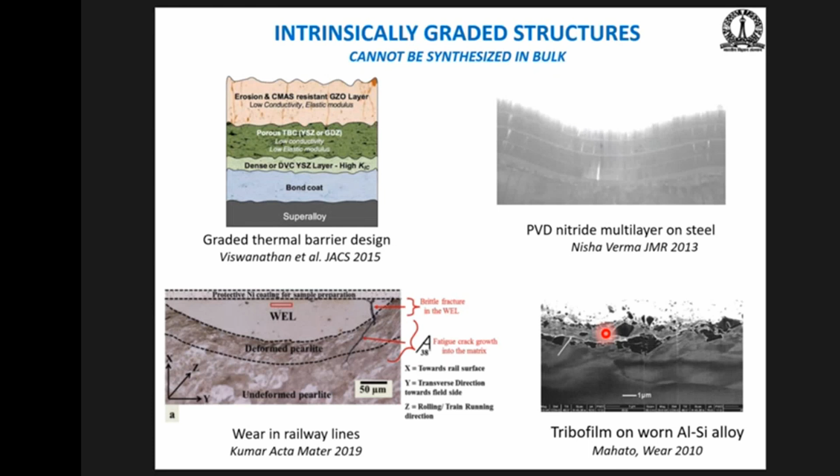So that's one class of systems where you need to find ways of testing small samples. Then there's a whole domain of life extension and repair. So this is a steam turbine blade. And on the right, you have some gas turbine components, which you'll see the damaged one here and how it is rebuilt with additive manufacturing.

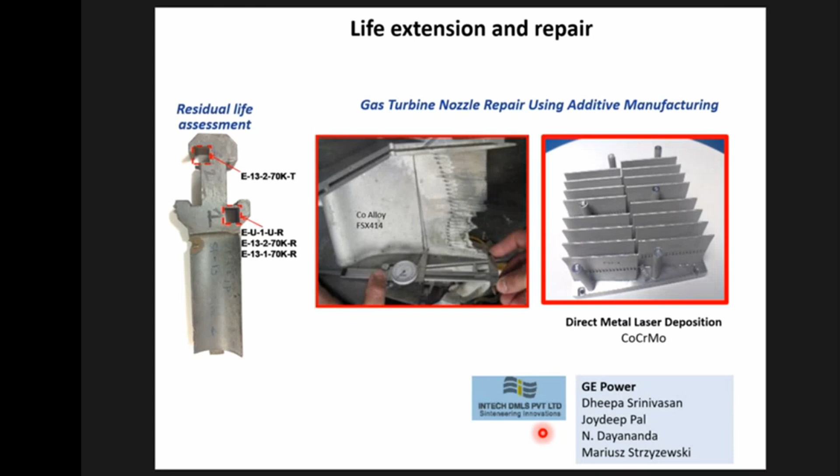This is again from the work of people in GE Power and Intech. So you need to be able to evaluate what it is that you've added on, whether its properties are satisfactory and whether they are integrated to the bulk and the interface is all right.

In case we think this is all very new, the testing of small systems goes back a long way. And I was preparing an article, and I'd always thought Griffith was the first person to look into this whole business of strength and glass fibers and so on. But about 20 to 30 years before, there's this gentleman called C.V. Boys, C. Vernon Boys, I don't know what the C is for, who was testing quartz fibers made by taking

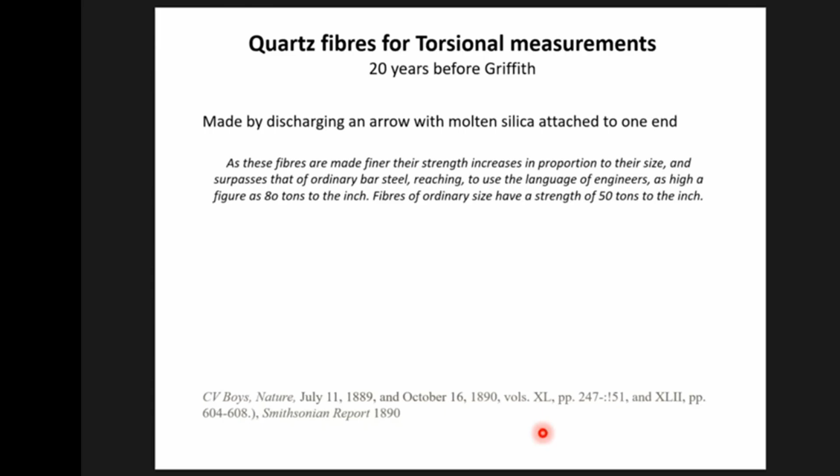a bit of molten silica and firing it out from the tip of an arrow. And so as it flew out, it solidified very rapidly and made very small fibers. And he was able to do things which are quite astonishing for that period in time. He was able to measure the gravitational constant using much smaller objects than Cavendish did in those famous experiments. And if you work out the numbers, in terms of force that he was able to measure, he was measuring forces as small as femtonewtons, being able to detect the radiation from the moon, from a candle, and so on.

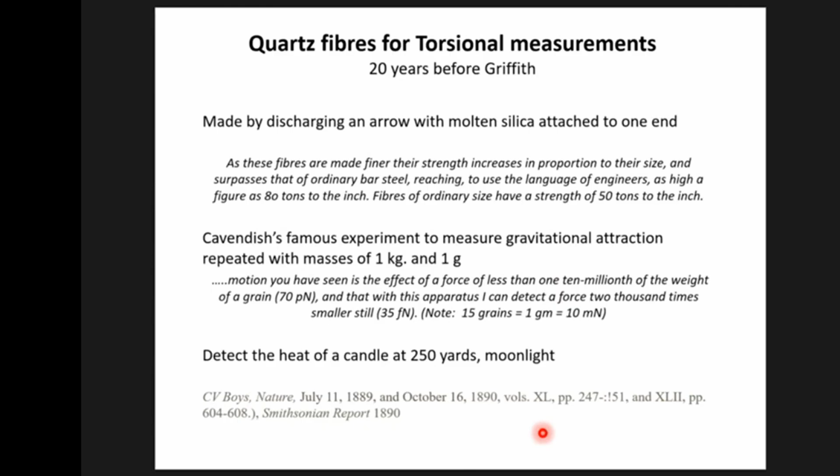About contemporary with Griffith was also this paper from the Bureau of Plant Industry, some very obscure institutions that did such work, where people were interested in thermoelectric wires, and these were for temperature measurements. And so these were experiments where very fine fibers of bismuth and antimony were drawn. And some of the things we now know very well were understood even then, namely that the strength increased and that the materials exhibited a fatigue limit. That is, below a certain stress, they would not fail at all, stand indefinite bending.

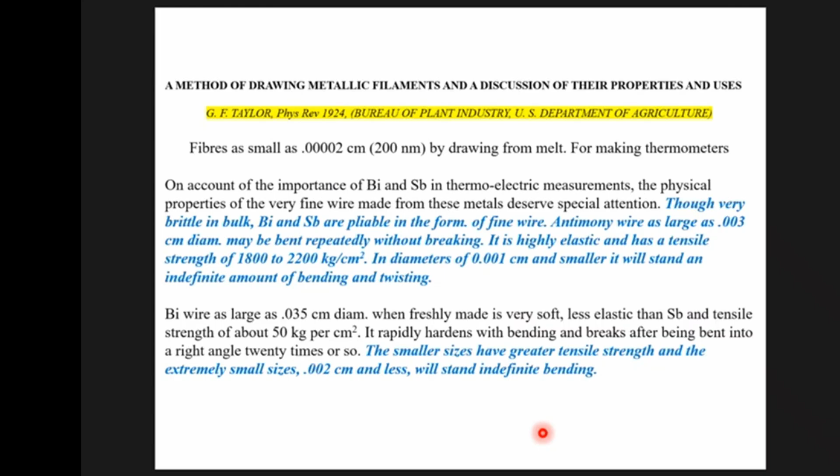The other part of this business is bending and the convenience of bending. I think it's arguable that mechanical testing began with bending earlier than people did uniaxial tension. And this applied to elasticity, plasticity, and of course, creep.

And these are two papers from the early 1930s, where they took some enormous lead beams and put strain gauges on them and established certain things. First of all, they established that the strain was linear across the cross-section, even though the stress and strain are no longer linearly related. This is power law creep. They established that after a primary stage, if you look at the strain, it reached a steady state. That is, the strain increased linearly with time.

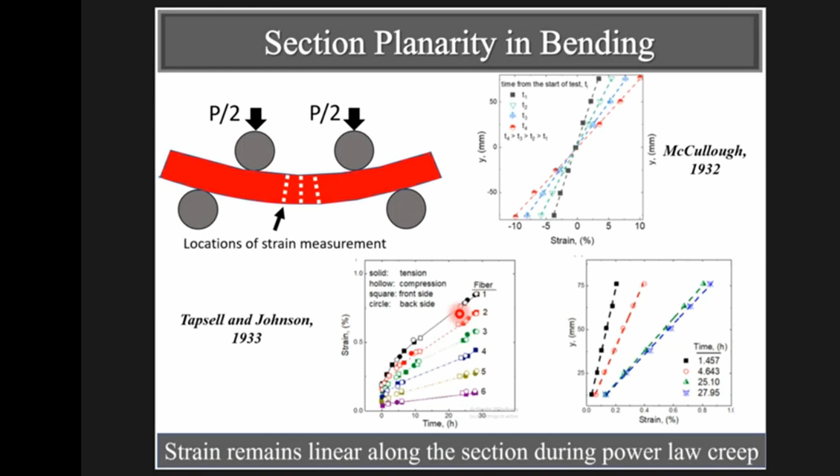So they were able to recapture many of the attributes of uniaxial creep in a bending experiment. But the catch was that since stress and strain rate are not linearly related, you didn't know what the stress was. You could measure the strain and establish that it's linear, but you didn't know what the stress is. This is fundamental to all bending experiments involving nonlinearity. In uniaxial experiments, you take the load and divide it by the area to get your stress. You can't do that here.

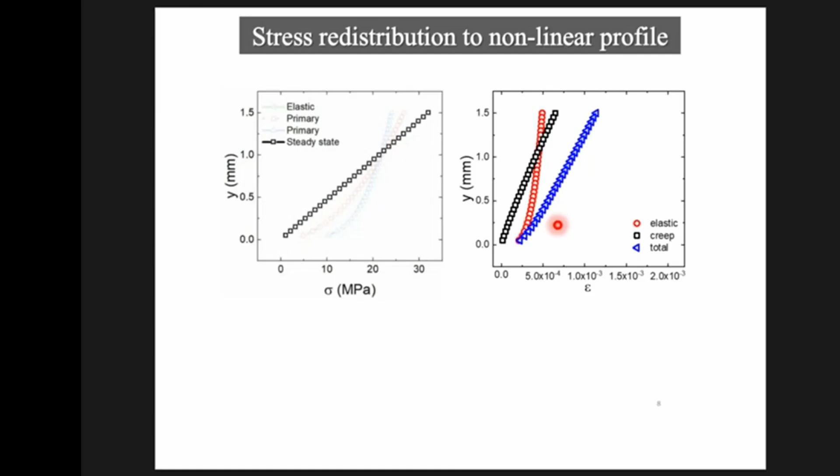Here's what's happening. Point 0 is the neutral axis, the midpoint of the beam, so we're showing one half of it, and the x-axis is the strain. When you start, you're predominantly elastic, so total strain and elastic strain are more or less the same. There's very little creep. As you start creeping, the nonlinear part of the deformation becomes more important, and your stress now has to adjust itself because the strain remains linear and therefore the stress can't be linear. So you have this phenomenon of load shedding: instead of the stress being here as in elasticity, it drops, and near the neutral axis it actually increases.

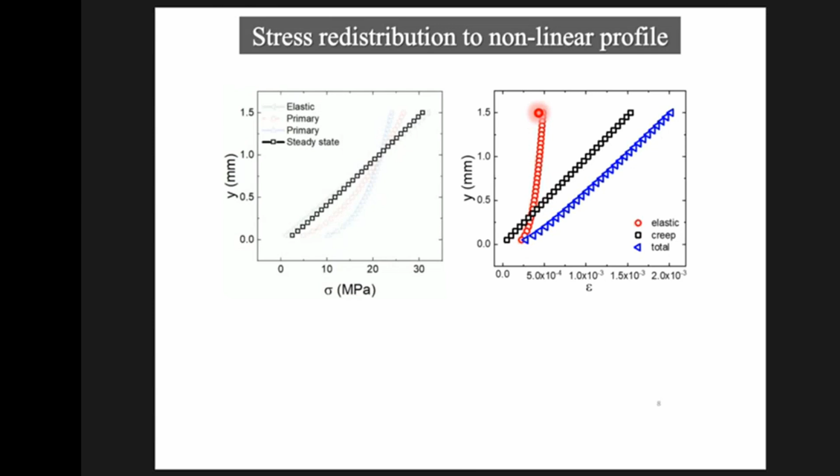So if you think about it, this is the same phenomenon. By the time you've reached a large creep strain, where you can neglect the elastic part, your total strain is more or less your creep strain. But the distribution of elastic strain actually tells you the stress, so the stress distribution is proportional to the elastic strain.

This is a very familiar phenomenon, nothing very mysterious. We see this in a fiber reinforced composite: the load is shed by the softer material to the harder material. In a dual phase ferritic-martensitic steel, the stress shifts to the martensite, and so on. This is a case where you have load shedding from a purely geometric effect. We know this in bimaterial beams: if one half is stiffer than the other, it'll take more of the load, and the neutral axis will shift to the harder side.

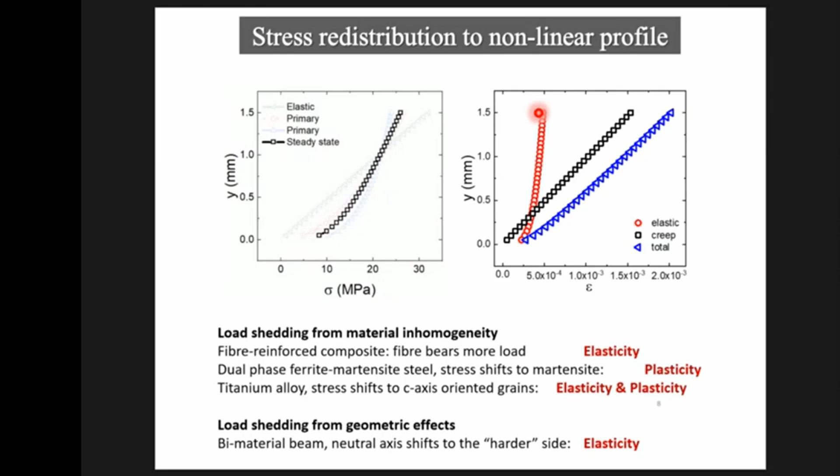So this is a brief historical survey of the people working in bending, starting with elasticity and creep. After these early experiments, around the 1930s up to the 50s, bending sort of fell out of favor because of this nuisance, that you didn't know what the stress was.

People were perfectly happy to do uniaxial experiments, with one exception: ceramics, because it's difficult to do uniaxial experiments, especially in tension. So people continued to do bending in ceramics and look at many aspects of deformation, particularly creep, because there's not much plasticity otherwise. If you're interested, there's a review in the Journal of Metals from about 6 years ago, written by a former student of mine now at Johns Hopkins, which surveys this part of the history.

So this is an outline of what I'll present: the idea of getting multiple stress-strain rate pairs from a single test, so you replace half a dozen creep tests with one test; sample thickness effects; and the situation where you don't have steady state creep. Namely, there are some systems where you either go into tertiary very quickly, or you have a non-steady state decaying creep, sort of Andrade-type deformation.

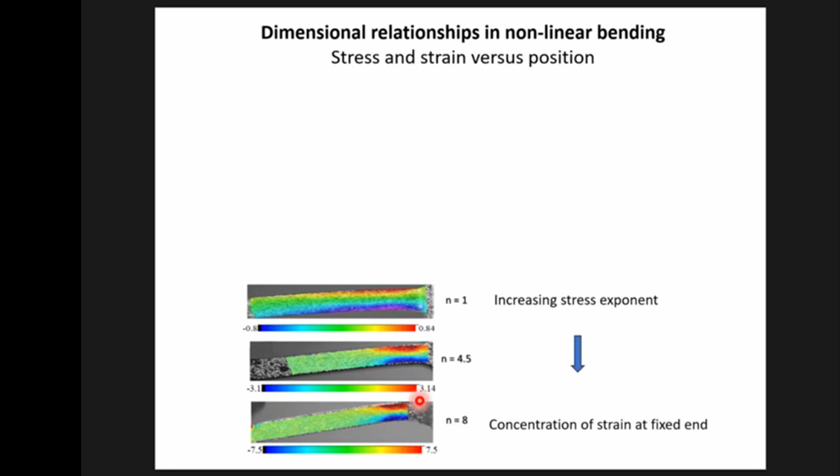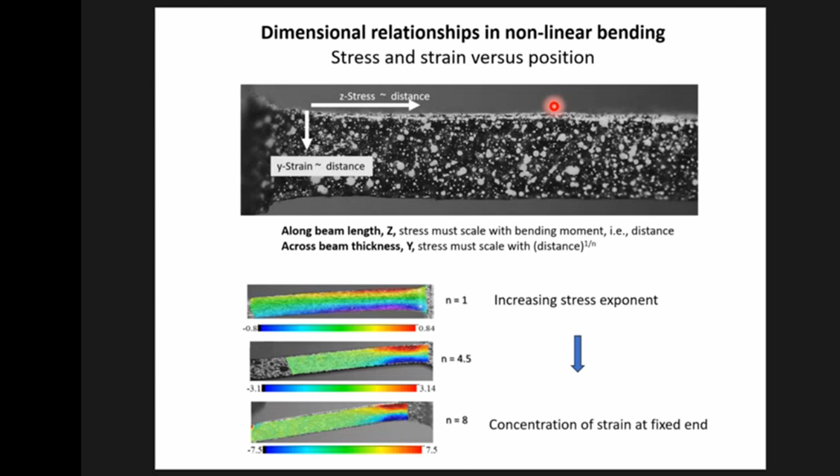Nevertheless, there are certain dimensional relationships that hold. The first is that stress must be proportional to the bending moment, and therefore it scales linearly along the length of the beam. Compatibility dictates that the strain is linear across the cross-section. So you don't know what the stress is across the cross-section, and you don't know what the strain rate is along the length, but these two must hold.

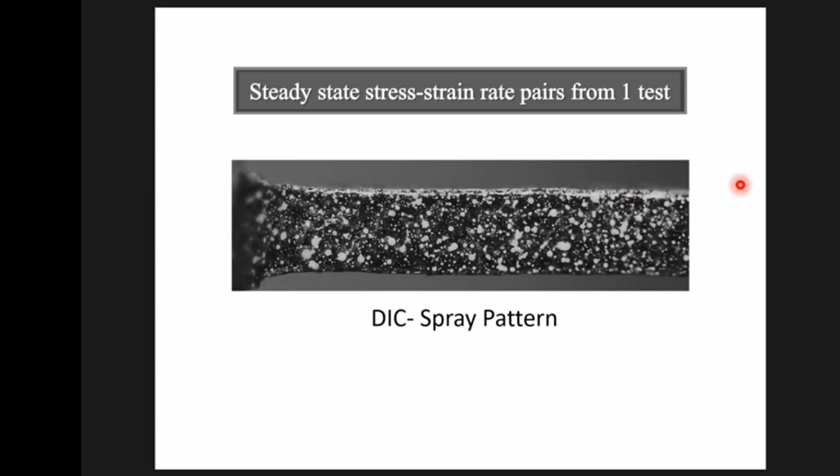So here's roughly how it works. This is the DIC spray pattern. What you see on the left is the fixed end of the cantilever, and the load would be applied somewhere on the right. And then as you monitor the strain, you'll see this beam bending.

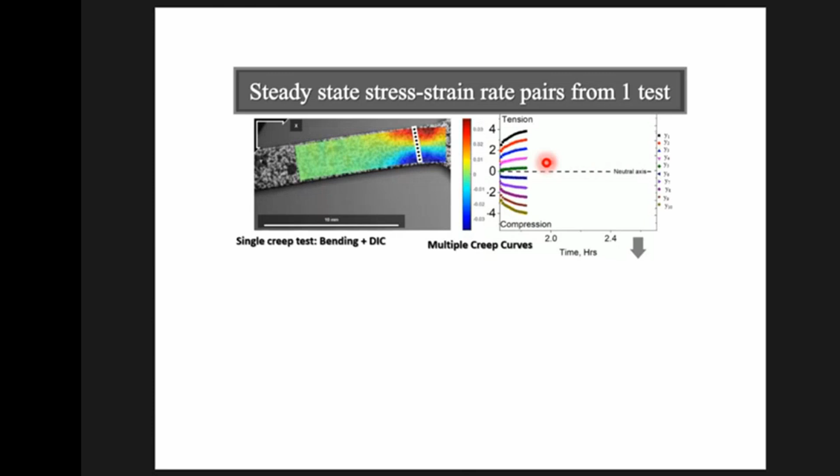Now that's as far as steady state creep goes. When you have primary creep, we know that the creep rate is changing with time. The exponent that relates stress and strain rate may not be the same as in steady state. But it turns out that when you watch the stress state change from the linear behavior to the redistributed shape, there is one point at which all these lines cross, more or less irrespective of what the stress exponent is. So the shape of the stress distribution across the beam depends on n, the stress exponent.

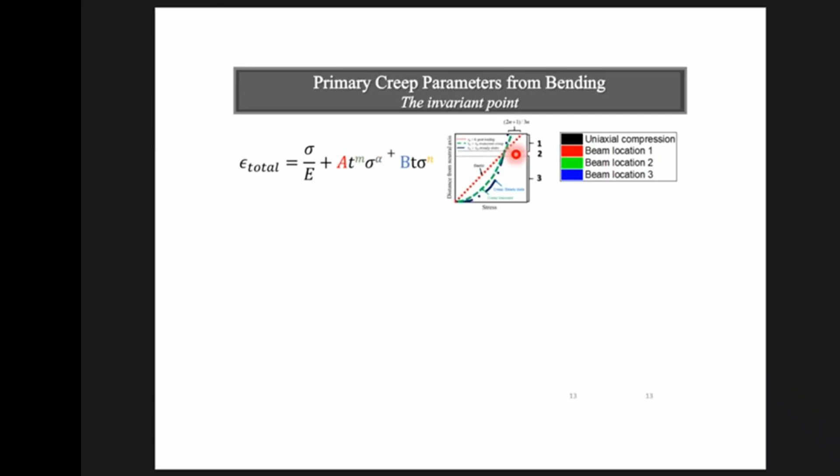If it were plasticity, it would depend on the relationship between stress and strain, which is the work hardening coefficient. So if you now monitor the stress at this point 2, which is roughly two-thirds of the distance from the neutral axis to the top surface, you will find that you can recover all these exponents. This is a representation of the total strain as elasticity plus the primary part and the steady state part. If you look at beam location 2, the green thing here, you'll find a very good correspondence with the black uniaxial data, because the stress there effectively doesn't change.

And therefore you're doing a uniaxial experiment at that point. So by moving along the length of the beam at two-thirds of the distance from the neutral axis, you are getting multiple strain rate curves for different stresses.

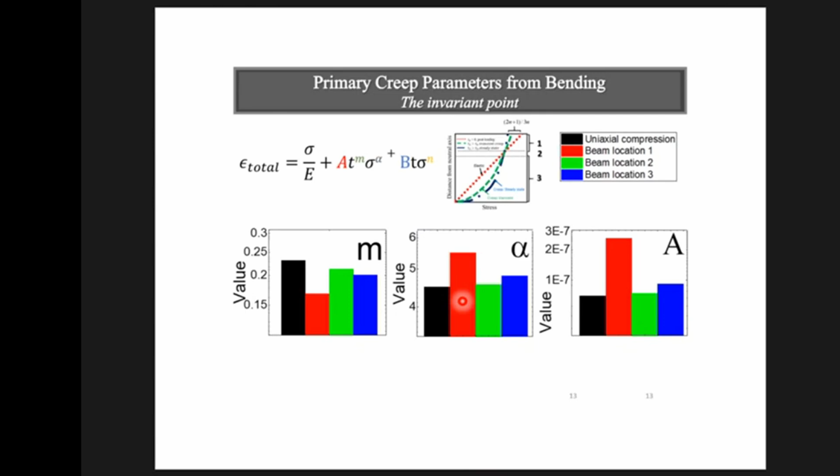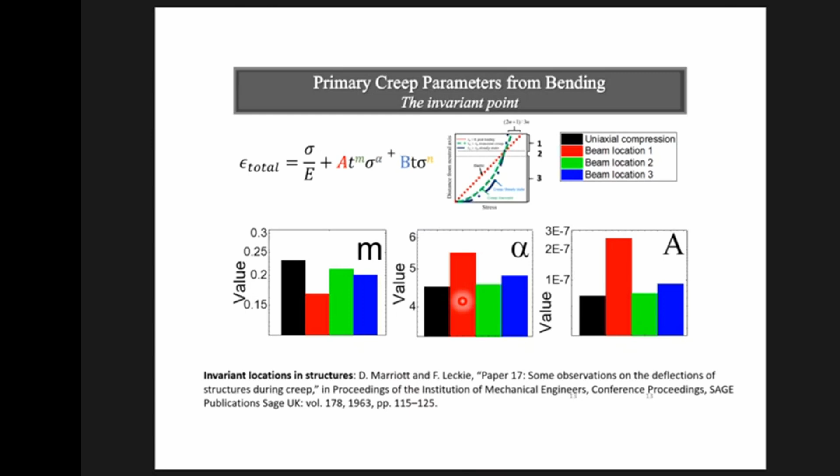Now, we thought we'd done something very clever, but then unfortunately the student read the literature more carefully and found that somebody had noted this in 1963. This is Marriott and Leckie. It's in some obscure proceedings, I don't know how she even found it. But essentially, this was a numerical calculation of beam bending which showed that there were certain points which they called skeletal points. We call them invariant locations. It's all the same thing.

Using this, one can do things like use additively made materials when materials are in short supply. I'll show you a bunch of curves like this. They basically tell you that the data you get from the literature and what you get from bending all fall on the same line. Essentially, you're getting multiple stress strain rate curves from one sample.

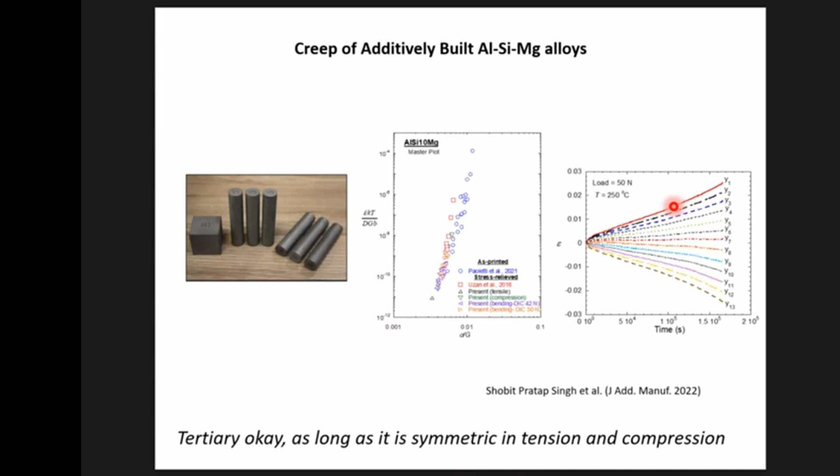Now let me address something which is a nuisance, namely sample thickness effects. If you're doing science, length scale effects are very interesting, but if you want to generate realistic data, length scale effects impose a limit on how small you can make your sample, because then you start getting information which can no longer be extrapolated to the bulk.

So here's a test. I must thank Anton Paar, who makes these micro indentation systems. At their lab, they had very small beams. This beam is about 0.5 millimeter in thickness. So we needed a facility for imaging and loading, which we availed of at their laboratory near Delhi.

So you'll see exactly the same bunch of curves, from that beam bending. There's a bunch of creep curves developing on the left. When you plot the data, bulk data, meaning anything above about 3 millimeters or larger, essentially gives you a scale independent behavior. But when you test smaller beams, you find there's a strengthening by a factor of anywhere from 10 to 100. So in bending, small beams are stronger.

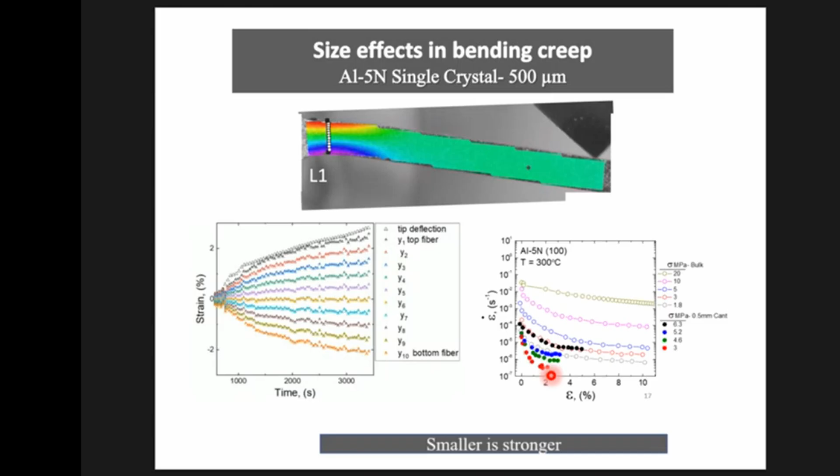Here's another example, commercial purity aluminum, 5 nines aluminum, at 250, 300 degrees. Again, this top set of data is for what's called bulk, anything which is 3 and above. Here we're progressively reducing the thickness of the beam, and you'll see very dramatic differences—in this case, probably 2 or 3 orders of magnitude strengthening that you get from small beams.

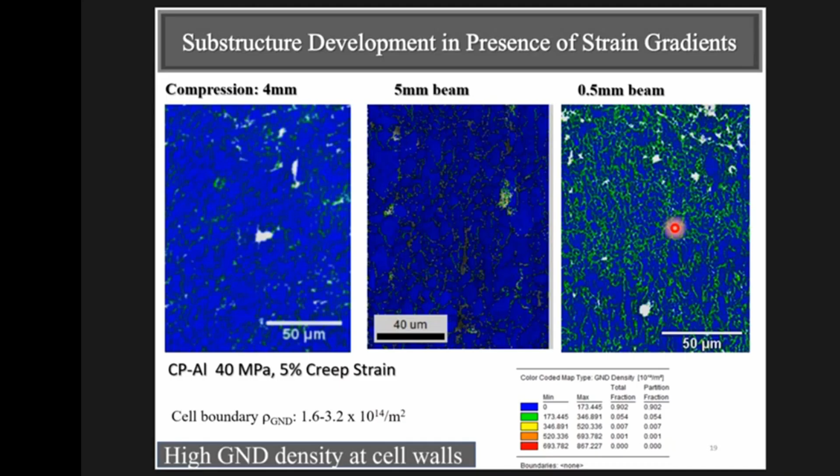Now it turns out that the substructure you develop during creep is similar to what you have under uniaxial conditions—that was established independently. But when you get to very small beams, you get a much finer substructure of dislocations. We argued this is because of geometrically necessary dislocations, since your strain gradients are extremely high. Remember, at the neutral axis the strain is zero, and you have maximum strain at the surfaces. These pump in additional dislocations, which refine your structure and thereby reduce the creep rate.

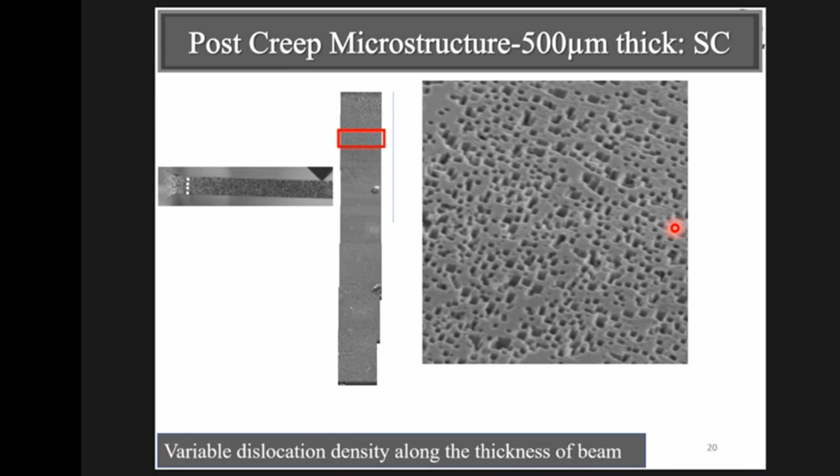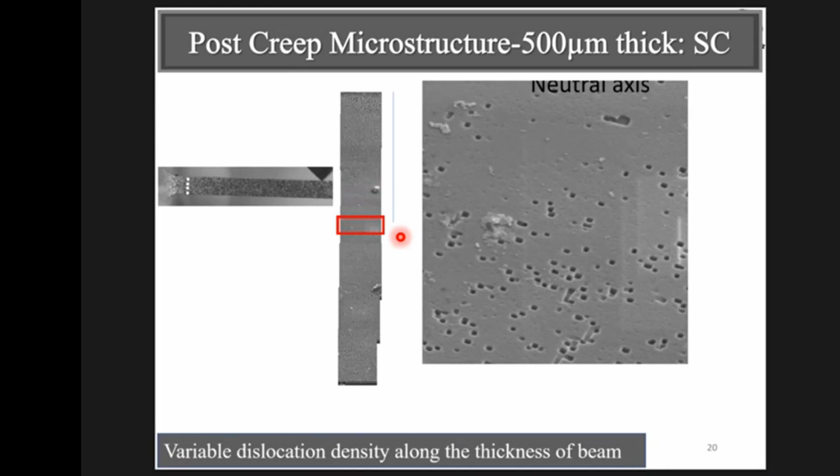What the student did here was etch pit the sample and look at the dislocation density—this is aluminum—from top to bottom. You'll see that as you approach the neutral axis, somewhere here, the dislocations all disappear, and then as you get into the compressive side, they start picking up again.

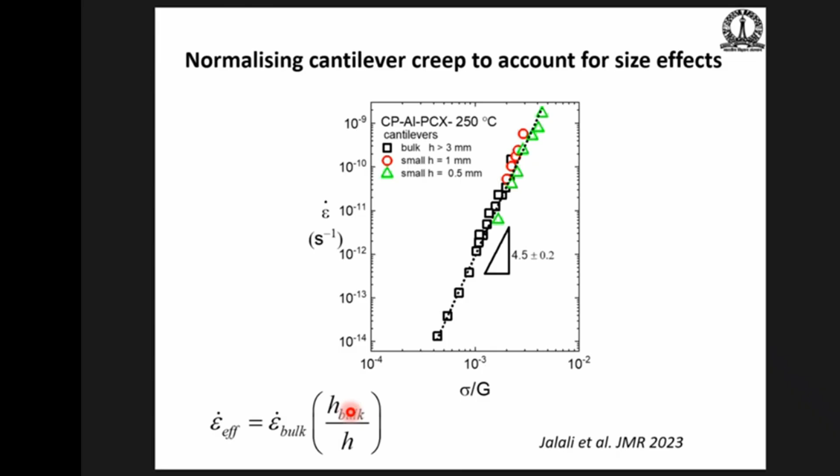So you can standardize this. You can normalize it and bring it to a length scale independent, or size independent, parameter, shown here—except one doesn't know what H bulk is, so this is a fitting parameter. If you use a certain value of H bulk, then anything smaller than that scales linearly with the magnitude of that ratio.

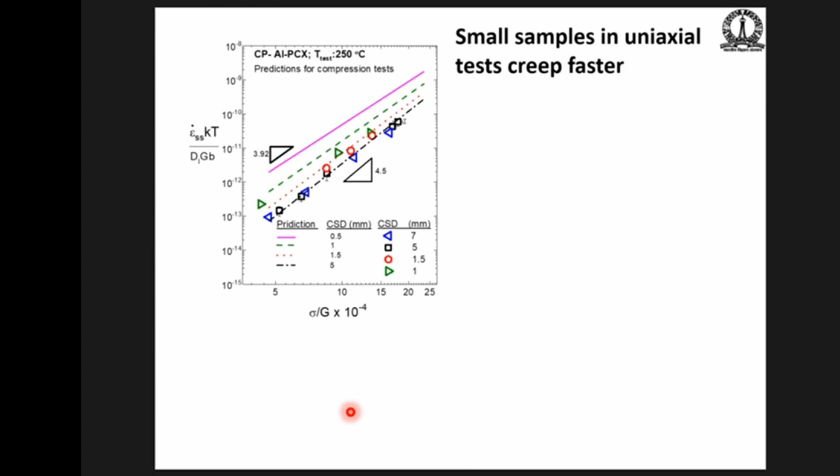Interestingly, this is in contrast to uniaxial experiments, where small samples are softer. They're softer because there are no strain gradients there, but the microstructural length scale near the surface is actually coarser than in the bulk, because dislocations escape easily from the surface. This surface-affected region creates a sort of composite—you have a soft outer surface and a stronger inside. So your creep rate increases as the proportion of surface area becomes larger.

Now let me come to the case of titanium alloys at room temperature—a very unusual phenomenon. Titanium is a very refractory metal, but it exhibits room temperature creep, which is exacerbated by fatigue. This is a very important aspect that contributes to failure.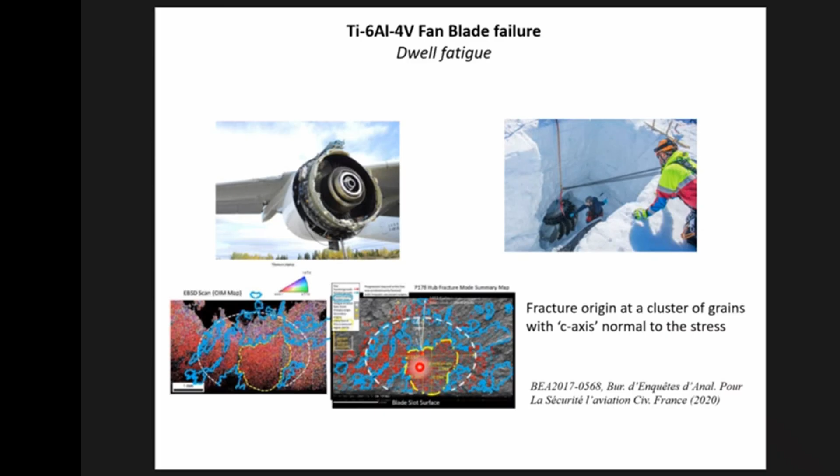Now, we got into this because somebody paid us money to get into it. But then we realized this is a very complicated problem, so we backed off to look at a simple case of a highly textured titanium alloy, shown here, where you have a very strong rolled plate—the normal of the roll plate is very strongly 0001, meaning in the plane of the plate you're looking at something largely in the basal plane.

Now, titanium is complicated for many reasons. Apart from creeping at room temperature, it also has tension-compression asymmetry, and we didn't want to deal with that right away. And of course it has this decaying creep—you never reach steady state. So we began to analyze this problem, doing some mathematical analysis along the rolling direction, where we expected things to be symmetric in tension and compression.

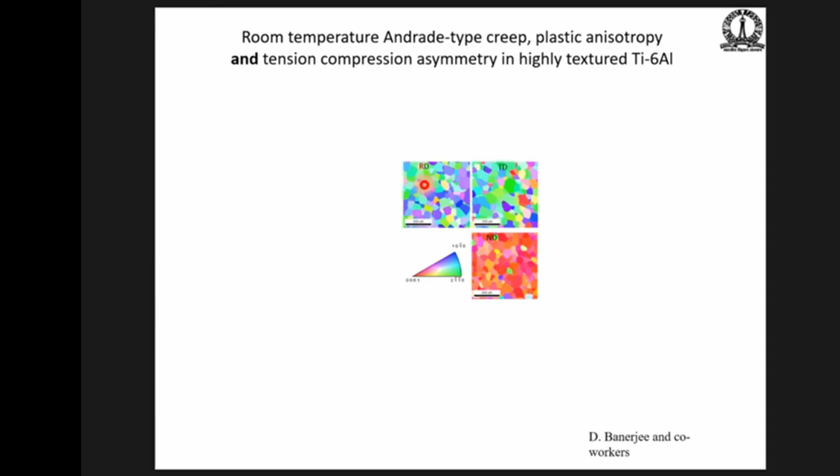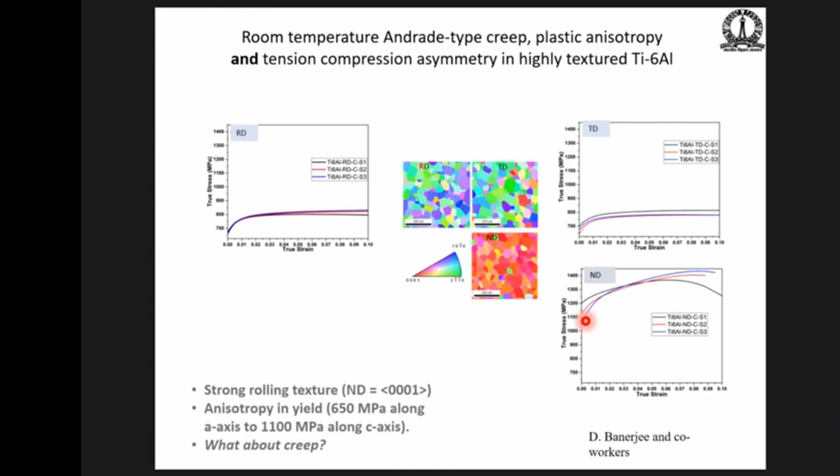Just to illustrate the yield stresses on the rolling and transverse directions, you'll see the yield stress is around 700 megapascals. Whereas if you get to the normal direction, the yield stress is about 1100, about 50% larger because of the strong texture. If you try to pull along the C-axis, the resolved shear stresses on easy slip planes are very low, so you have to activate pyramidal slip with C plus A Burgers vectors. So this was the challenge before us: strong rolling texture, anisotropy in yield.

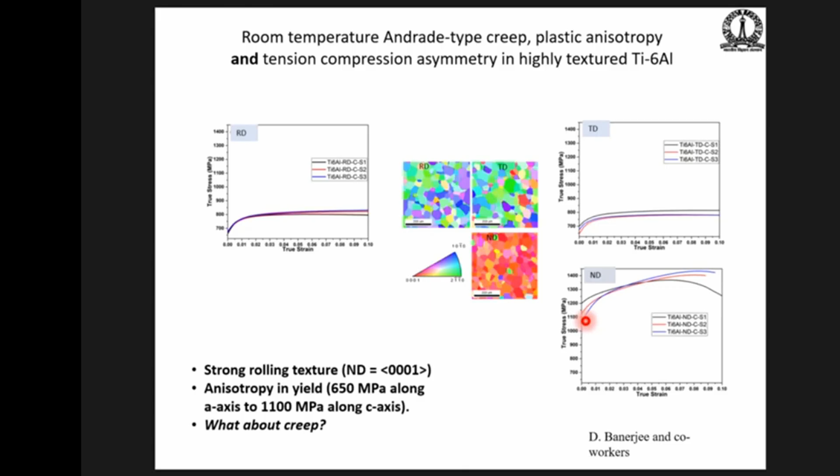Now the question is, what about creep? Bending is ideal here because when you have a rolled plate, it's very hard to get samples along the thickness direction. But we'll start with the rolling direction. What you find is that it's nice and symmetric, which is reassuring. Everything above the midway point, the neutral axis, is in tension, and below is in compression. This is just a creep test at room temperature, measuring strains using digital image correlation.

Now we set about trying to model this exercise. I won't labor this too much, but basically you're working at stresses where the material may have yielded. These are extremely high stresses at which creep is taking place, which is very different from high temperature creep, where you're at a small fraction of the yield stress. So we fit the uniaxial behavior, the stress strain curve, the creep curve, and then use that to predict what will happen in bending.

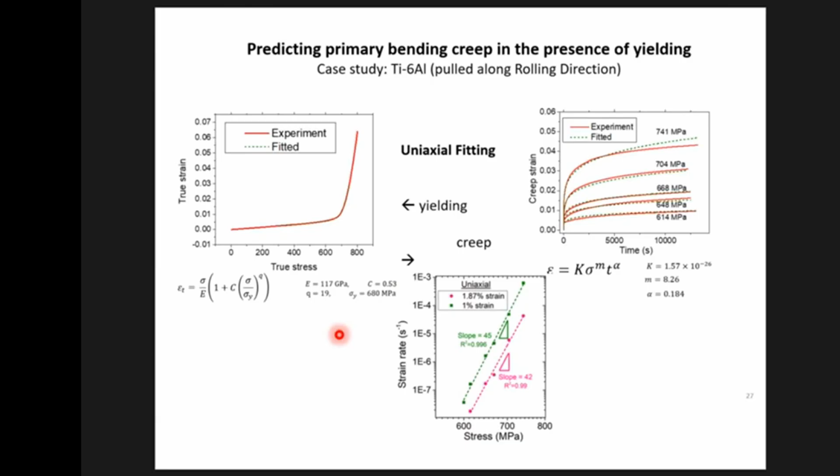This is the reverse of what we want to do, but this is just to see if what you measure is consistent with what you predict. Remember that when you do a creep test in bending, the stress is changing all the time. At a given point, the strain rate never reaches steady state. So this is not steady state strain rate, but steady state stress distribution, if you like.

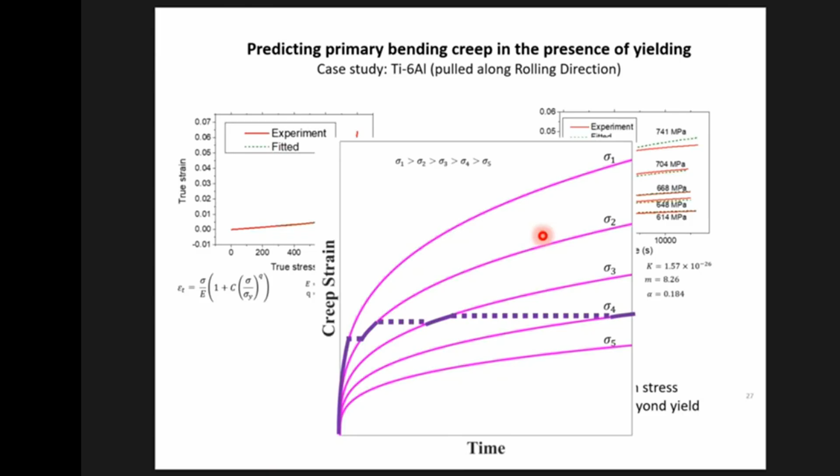So you have to adjust the deformation rate at any point by moving from one creep curve at a stress of, say, sigma 1, to a changed value at sigma 2. This is done iteratively for the entire beam in a self-consistent way, so that you balance the bending moment, whatever load you're applying, and maintain strain linearity across the section. When you do that, you get a reasonable correspondence between the prediction and the experiment of the deflection. The only thing you're measuring here is the deflection rate.

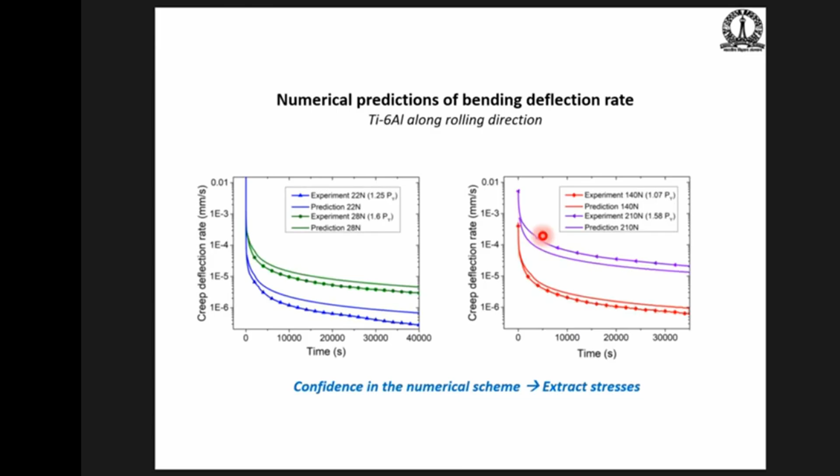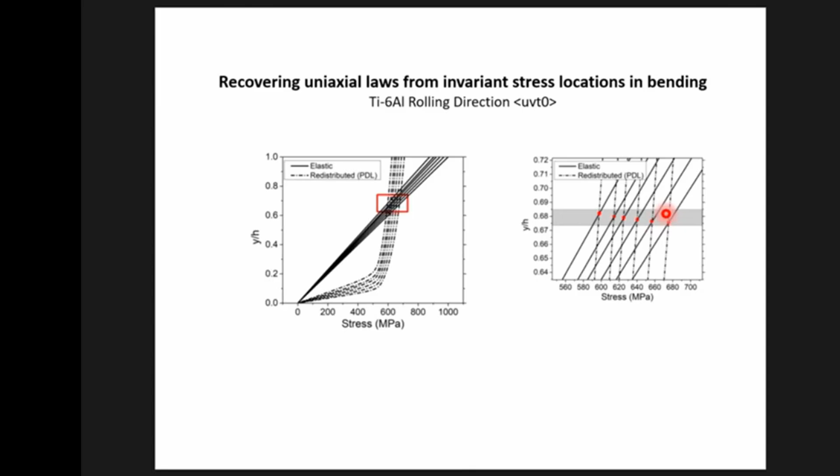This gives us confidence that the model works, which means you can now go back and extract stresses, because the model includes the stresses and strains at every position. And if you do that, what you find is that, once again, there is this so-called invariant location, even in the situation where you have decaying creep, plasticity before creep begins, and so on. So now we can go back to these locations with confidence that each corresponds to a particular stress, and back out the strain rates, comparing them with the uniaxial strain rates.

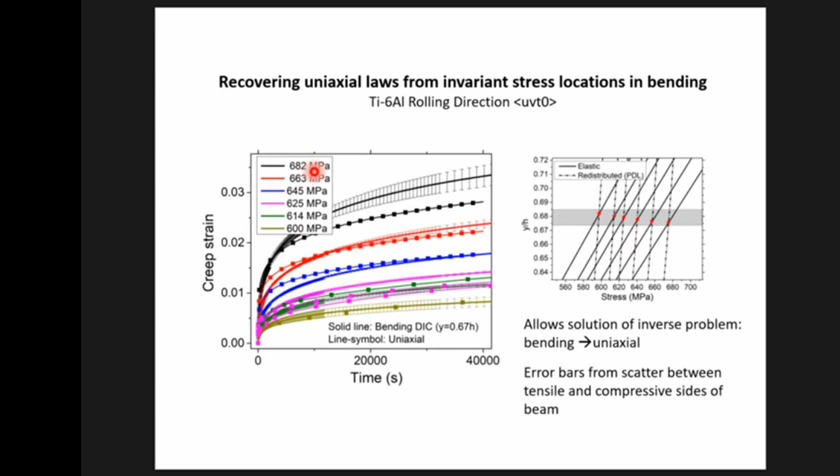And this is what you end up with. Given the scatter in creep, this is not too bad. Basically, you're getting multiple strain rate stress curves between 600 and almost 700 megapascals from one bending experiment. This gave us confidence that one could extend this analysis to non-steady state, decaying creep situations, while maintaining tension compression symmetry.

From this, you can establish what your constitutive law is in polycrystalline Ti-6-4, and extract these creep parameters. This is below the yield, this is above the yield stress, and this is below the yield stress. These results just came in a week or so ago. I've asked the student to see if we can fit them all into one, but you'll find that the stress exponents and the time exponents of the decay are all very similar.

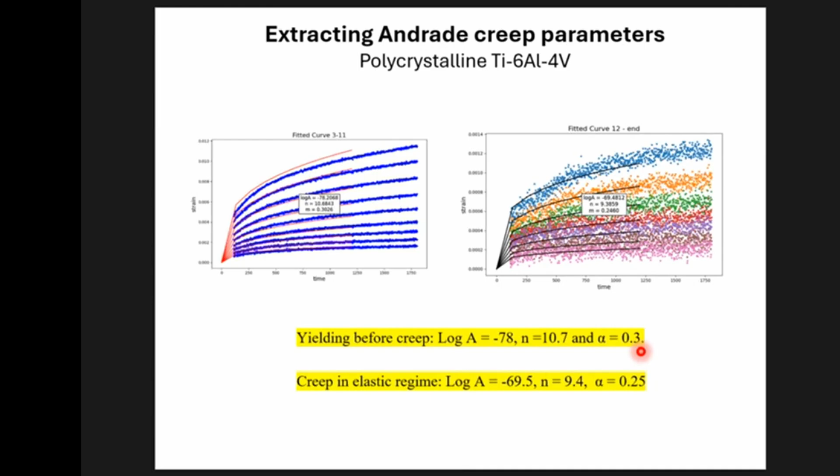Now let's come to tension compression asymmetry. This is an outstanding problem. It's been dealt with in ceramics, concrete, many materials which creep over geological timescales but which have inherent porosity. They are by definition almost tension compression asymmetric. People have grappled with this problem, and this is from some work on refractories. You'll notice that the original midpoint of the beam is here, but the neutral axis has shifted to one side after a long period of refractory deformation.

The problem with most of these analyses is that they assume steady state is reached, whereas almost certainly, because of the asymmetry, the tension side cavitates, and when it cavitates, it goes on creeping faster. When it creeps faster, it sheds more load to the compressive side. So it's a very dynamically evolving situation.

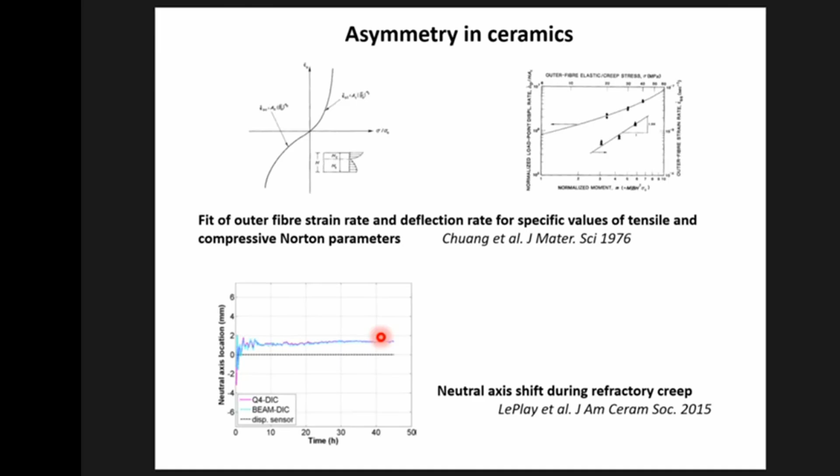If you now look at this material, namely the strongly C-axis textured material, you'll see that there's a huge asymmetry in the strain, in the tension side and in the compression side. On the tension side, you're about 0.55, and on the compression side, you're at about 0.2, about a factor of 3 difference in the strain.

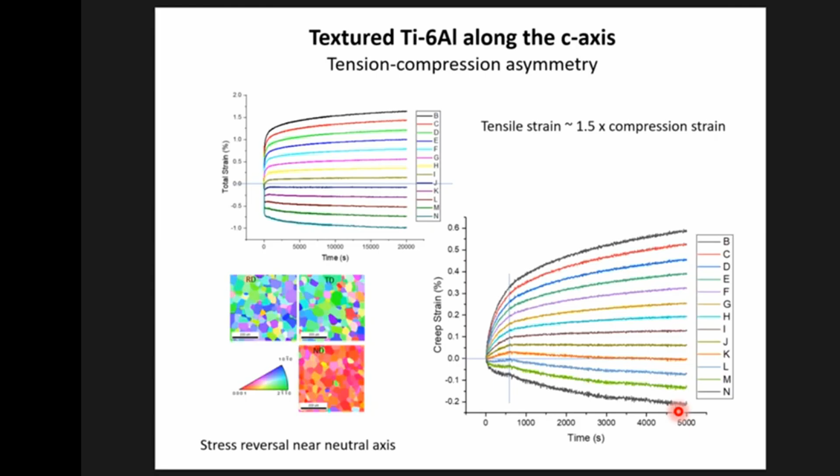So this is the problem that we're currently grappling with. We can find a student to continue the work, because here there are too many unknowns to be able to take experimental data and try to recover a constitutive law. You have 3 unknowns in tension and 3 unknowns in compression. So one has to do a little more work, and this is where we think some machine learning techniques might be of use.

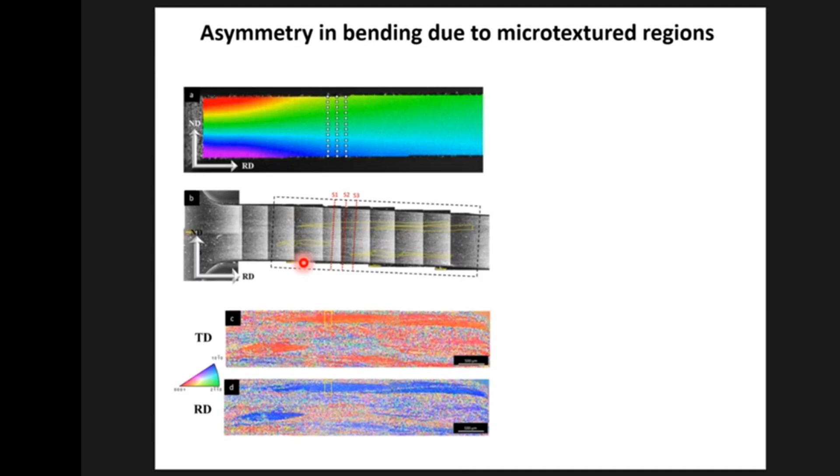Now, what happens if you have these microtextured regions? Here are these microtextured regions - this shows you the orientation of the C-axis along the transverse direction. You'll see they are millimeters in length. These are extremely large inhomogeneities. So clearly, if they land up in either the top or the bottom half of the beam, it should be reflected in the way the beam deforms. And indeed, you can see that.

If you have a soft MTR in the tensile half, the tensile strains are much larger than the compressive strains. If it's reversed, the compressive side deforms more than the tensile side. If the MTR is on both sides, but you're pulling along the C-axis, then the beams are differentiated not because one half has an MTR or not, but because tension and compression are different when you pull along the C-axis.

By the way, the difference in strains doesn't look very large, but remember that the moment you have asymmetry, the load sheds. So the tensile side actually becomes less loaded, and the creep rate falls. The compressive side becomes more loaded, and the creep rate rises. So the strain distribution always remains linear, which means that the tension and compressive strains can't be very different. But the stresses can be dramatically different.

Let me come to welds and additive manufacturing. One of the programs we undertook was to look at the residual creep behavior of boiler tubes. These had been run in steam turbines for up to 27 years. The question was whether this technique could be used to take very small coupons out and see whether the creep properties had deteriorated.

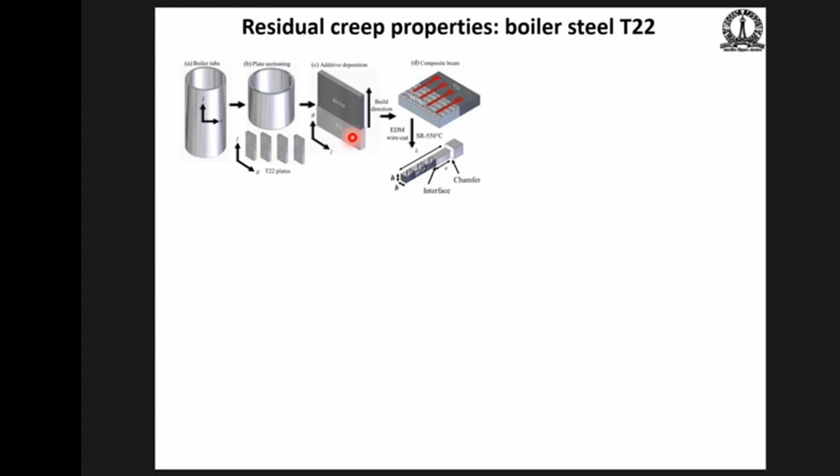So you can reduce the size of the coupon and increase the size of the handle, if you like, the lever arm. So we do different ratios of the two. This is the interface between the Inconel and the T22. It's a very small layer. We don't believe it has much of an influence. Anyway, it holds up - there's nothing special going on there.

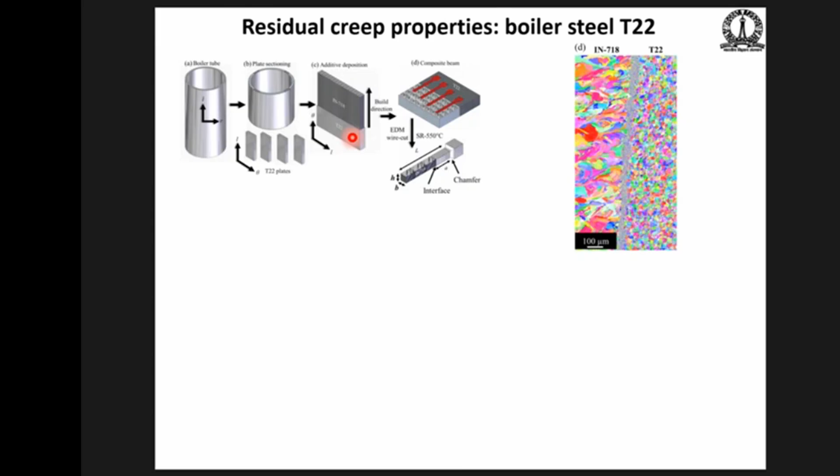And so one can again start doing experiments where you recover the strain as a function of time, except now part of this is your sample and part of this is Inconel. So this is what you get: whether you have a monolithic material or 30% - that is, the length of the cantilever is 70% Inconel and 30% sample steel - your data more or less collapse onto the same line. And there is a factor of 7 or 6 or so increase in the creep rate with respect to the virgin material, which was put into service 27 years prior.

Now, of course, the interesting point here is how much smaller can you make it? So here the cantilever was, let's say, L. We were working with a sample just 0.3 L. It turns out that you can get to about the beam thickness. That is, you can use practically a stubby coupon where the thickness is the same as the length, and then just add on a long handle of something else. So this is a way of greatly reducing the amount of material that needs to be extracted, which is obviously useful if the component has to continue to be in service while you're doing all these analyses.

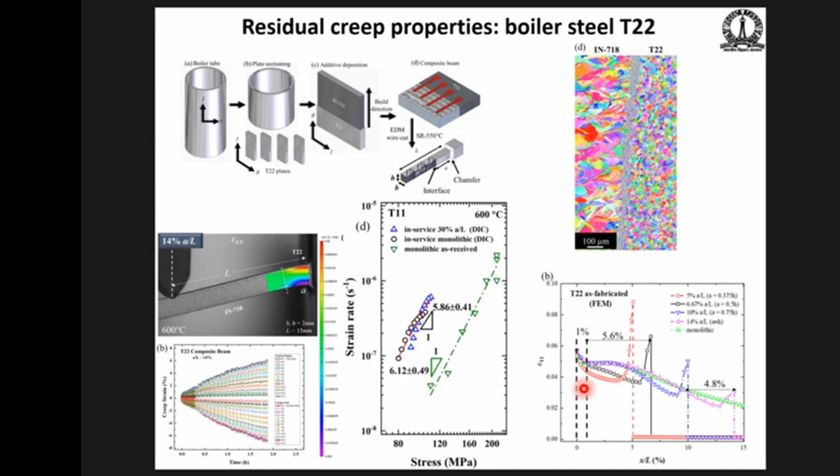I'm not going through the details, but what it says is as long as you stay about the beam thickness away from the interface with the weld, you're safe. You recover the bulk data.

And so we're now looking at welds, and these are for steam power plants in nuclear reactors, where we have a steel which is bonded to a nickel-based superalloy with a number of layers in between. There's a buttering layer, there's a weld, and so on. So one needs to know where the failure is likely to happen, which is a sensitive region, and an estimate of what the failure or what the creep rates are in that region.

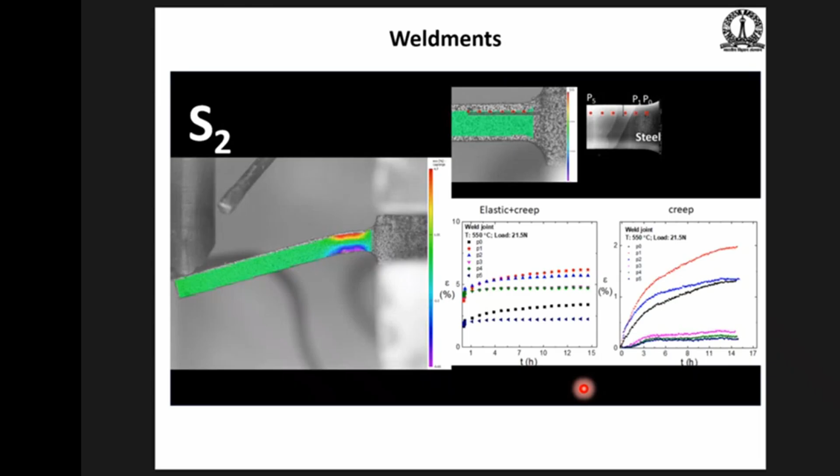There's an interesting consequence of this load shedding, and I'd like to illustrate that with this particular example, where we have two aluminum alloys. They're made by additive manufacturing, laser powder bed fusion. One is a scandium magnesium alloy, which is extremely strong at room temperature, and a silicon magnesium, aluminum silicon magnesium alloy. So if you look at the room temperature behavior, the black line here is a magnesium scandium, which is much stronger than that of the silicon. But by the time you get to 250 degrees, it reverses.

And if you look at the creep behavior at 250, you will find that the aluminum scandium magnesium alloy creeps about 100 times faster. Notice that the stresses here are 30 to 70, whereas in the case of aluminum silicon magnesium, it is 60 to 100. So if you look at comparable stress levels, you're looking at a ratio of about anywhere from 50 to about a few hundred.

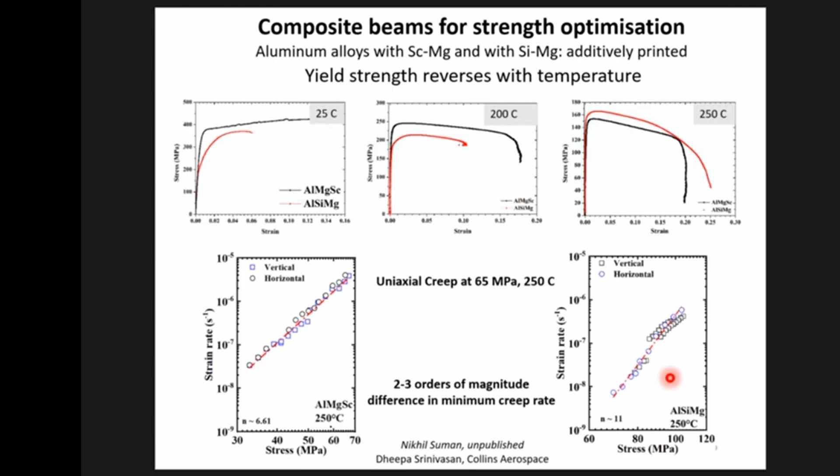So now the question is: is there a way of making a sandwich whereby you retain high temperatures, you retain your room temperature strength, but also don't pay the penalty when you go to high temperatures? So this is the sandwich that was made. One of them is on top and the other is on the bottom. And then you load it like a cantilever.

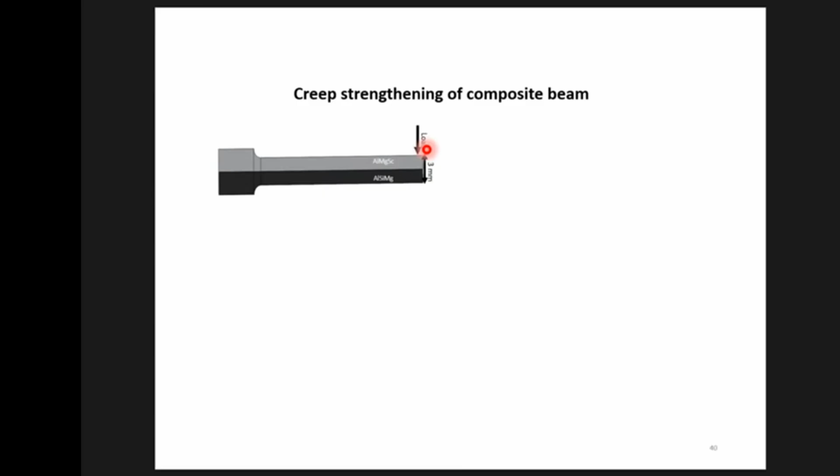And if you look at the strain rates, you will of course see that the strain is not symmetric, because now you have two different materials. One side is stronger than the other, and so the neutral axis shifts. But it's the magnitude of the strain rate that you achieve which is interesting here. For the same bending moment, you would have either a very soft material or an extremely hard material. By making the sandwich, the soft material's response has actually improved by about 50 times, simply because the load has been transferred to the harder material.

So if you do the finite element analysis, what it tells you is that even though the nominal stress under elasticity would give you, let's say, a maximum stress of 70 or 80 megapascals, because of this load shedding, the stress on the softer side has actually dropped to 30. There's a sharp spike near the midpoint of the beam when you move to the other material, and then the stress goes into compression. But the stress is of course larger there.

You have to compensate. If you take the load away from here, you have to put it somewhere else. But then that material is intrinsically harder anyway, so the increase in the creep rate there is not very significant. On the other hand, the reduction in the creep rate here due to the load shedding is very significant. So basically, you get an effective almost 2 orders of magnitude reduction for the same bending moment.

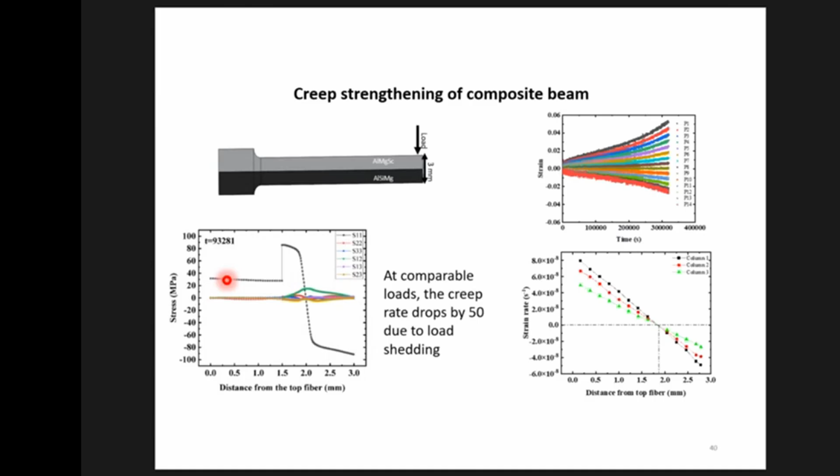So this might be of interest, for example, if you have a material like a heat exchanger. This is actually the original idea that the company had, was to use it in heat exchangers, where of course there are strong thermal gradients, and you would need strength and creep resistance over a range of temperatures. So we're currently working with a company. Well, the company is doing most of the work in developing a system which will translate this into a product.

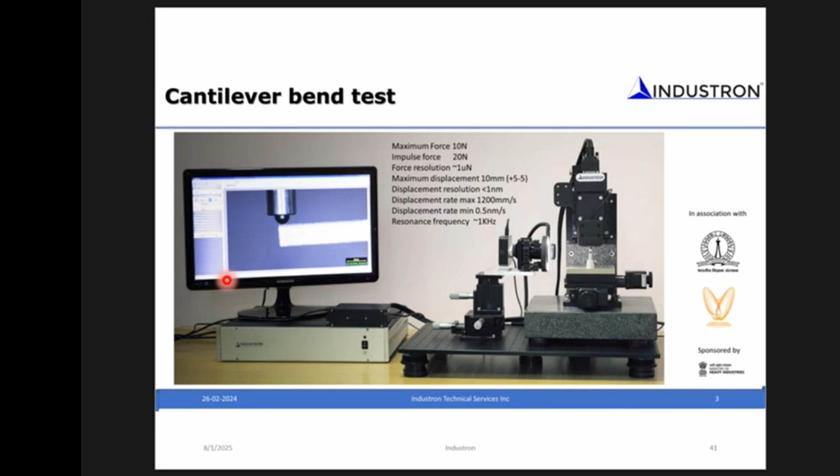Industron came out of Hysitron, but it's now an Indian company, and they have their own products of nanomechanical testing. And so this is one which is currently under development, which integrates cantilevers with digital image correlation so that you can produce multiple load displacement or stress strain results from a single test.

I take another 5 minutes? Oh, you're fine. Oh, okay.

I thought I'd introduce a topic relating to high temperatures, because this is a direction we are moving in, extending a lot of the steels and aluminum alloys into very refractory materials like niobium alloys and carbon silicon carbide composites. There are a number of issues in high temperature testing, but one of them is the stability of the patterns you use for digital image correlation.

Contact extensometry becomes a little problematic beyond a certain temperature, and it's really nice to be able to measure strain without poking around with the sample.

For creep experiments, you really need very long-term stability. A lot of DIC, even at high temperatures, is done with fracture toughness or stress strain curves. So if you have a strain rate of 10 to the minus 3, it doesn't take long to do the experiment—it takes longer to heat the sample up. But if you're doing a creep test for hours, you need much better stability.

So we had to develop better patterns which retain their integrity. That's number one. By the time you get to very high temperatures, there are other issues, and I'll show you some examples of problems we've had to overcome.

The advantages are obvious. This is what the machine crosshead gives you, and this is what the DIC gives you about the stress strain behavior. So there are all kinds of displacements happening in your machine which have to be subtracted out.

Extensometry runs into other problems too—the extensometer breaks every 3 runs and it gets expensive. So there are a lot of advantages of DIC: you get full strain field measurements, and this is the strain contour at a crack tip. So one can do all kinds of things with non-standard geometries.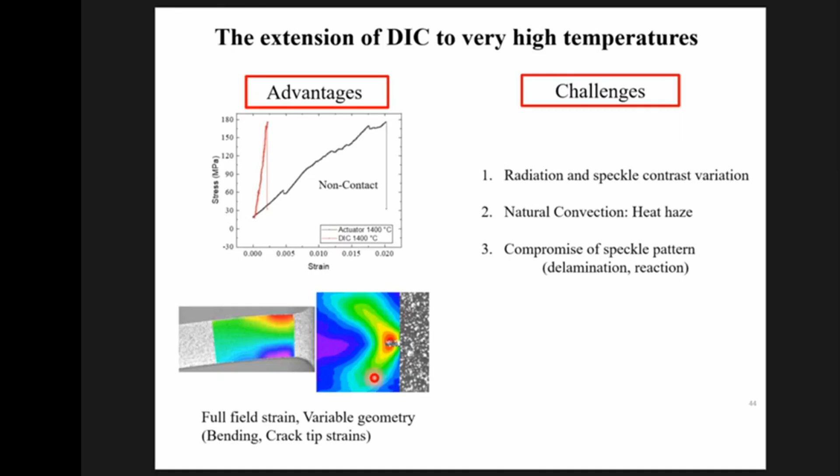So what are the challenges? The first deals with radiation, second is heat haze, and the third is chemical reaction. Let me show you some examples of these.

Here is an image of a carbon fiber silicon carbide composite at room temperature, 1200, and 1500 degrees. At 1200 and 1500 it's invisible because the black body radiation completely swamps your detector. These curves show the variation of the black body spectrum with temperature.

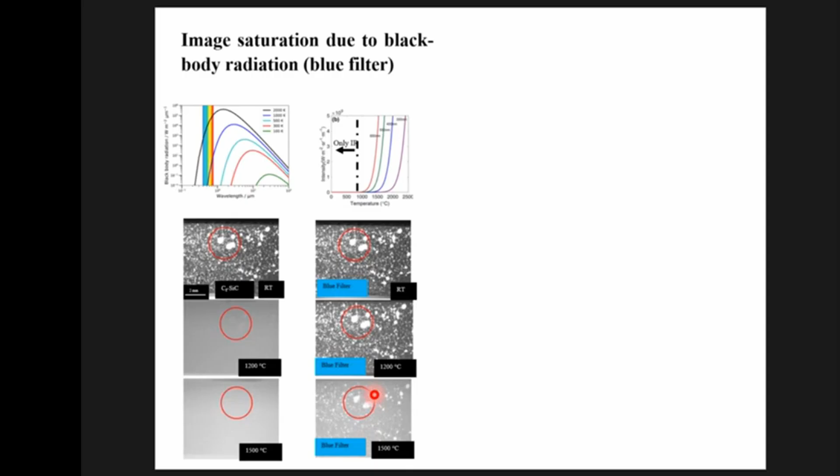But if you introduce a filter, you can now go up to 1500 degrees and still have enough contrast to make measurements. So that's what most of that instrumentation was—both the illumination and the filters and the detection side.

The second issue has to do with contrast variations from emissivity and reflectivity. You're shining light and some of it is bouncing back. You have a speckle on a substrate, and they have different reflection parameters with wavelength, so you get some curious effects.

The top pictures show the contrast at room temperature and 1250 from the same speckle. You'll see here is black on white, and here is white on black, which probably means it vanishes somewhere in the middle.

Next comes the effect of the incident illumination power. This is a light emitting diode, run at 14 watts here and 1 watt there. The temperature is the same—both at 1600 degrees—but here it's bright on gray, and here it's black on white.

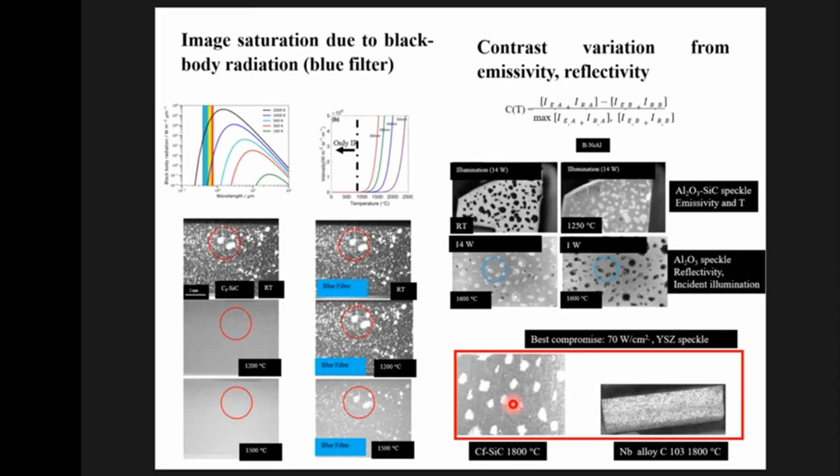So finally, you need a compromise which allows you to do all this, and this is one compromise with respect to the power of the illumination. The speckle used here was a yttrium stabilized zirconia. When you go to very high temperatures, the number of materials you can live with sort of reduces.

Heat haze: the natural convection from a hot surface will cause refractive index changes, and this is a bit uncontrolled. If you have this haze where hot air rises to the surface, your sample rapidly blurs. Whereas if you use a fan, a light fan, to maintain some laminar flow conditions past the surface, everything remains nicely resolved.

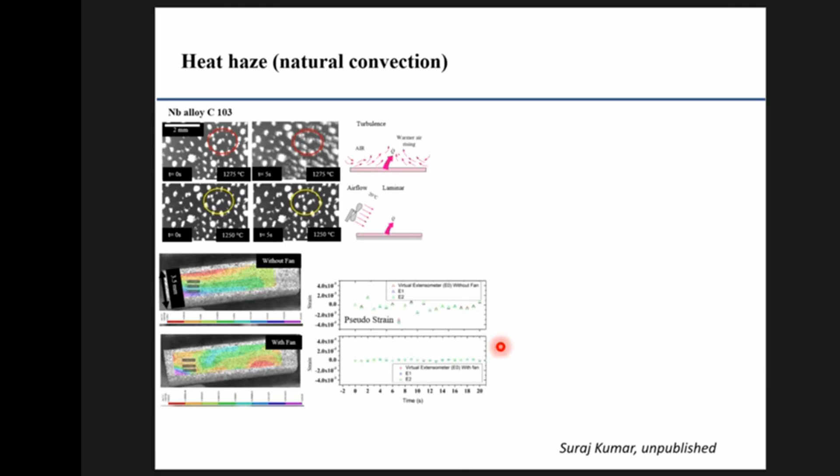So if you carry out strain measurements with no stress, you're essentially measuring the background noise in your system. With heat haze, you have all these fluctuations, but with laminar flow, you get a nice horizontal line that's practically zero. So you have to do this if you want the highest strain resolutions.

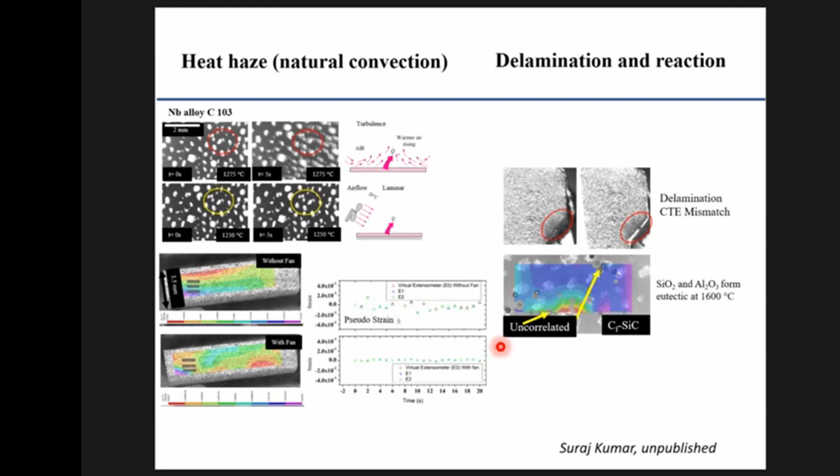The last issue is delamination and reaction. We used alumina, and in one case there was a surface layer of silica, and the alumina and silica react. There's not a whole lot you can do about this, except you have to be sensitive to the paint you use, depending on the sample you have.

Using this, we were able to carry out thermal expansion measurements. This is for niobium alloys. You'll have one set of curves from the literature, and one from the DIC measurement. And this is carbon fiber silicon carbide. You'll notice there's a reasonably good correspondence between what we're measuring and the literature.

So this one is at least 1800, probably higher, because some thermocouple made of platinum melted along the way. The student should be conservative in saying it's at least 1800, but it's probably around 1900 to 1950.

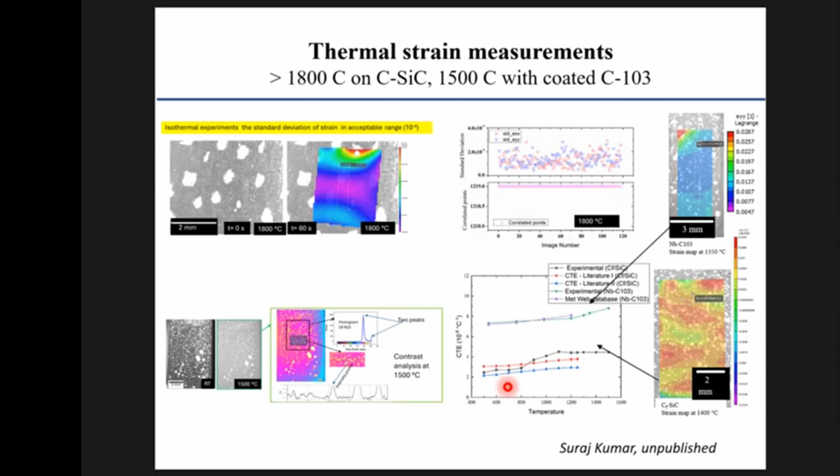With niobium, of course, you can't go that high. These measurements are made at 1500 degrees. So the strain measurement capability is there.

I'll show you an example of a test. This is now a mechanical test using this digital extensometer, if you like the DIC as an extensometer. We're not measuring spatially resolved strain here, like in bending. We're just looking at the pattern between the top and the bottom of the gauge length. One of the things that allows us to do is take smaller gauge lengths, because you don't get uniform temperature.

Shall we say, a reasonably acceptable plus or minus over what the company thinks is a constant temperature zone. We actually find that we can only take a smaller region to get reliable data for, let's say, plus or minus 5 degrees. If you use the extensometer and what the manufacturer gives you, you're at plus or minus 10, which is okay if you go by ASTM standards, but if you want precision, it may not be okay. It depends on how sensitive your deformation is.

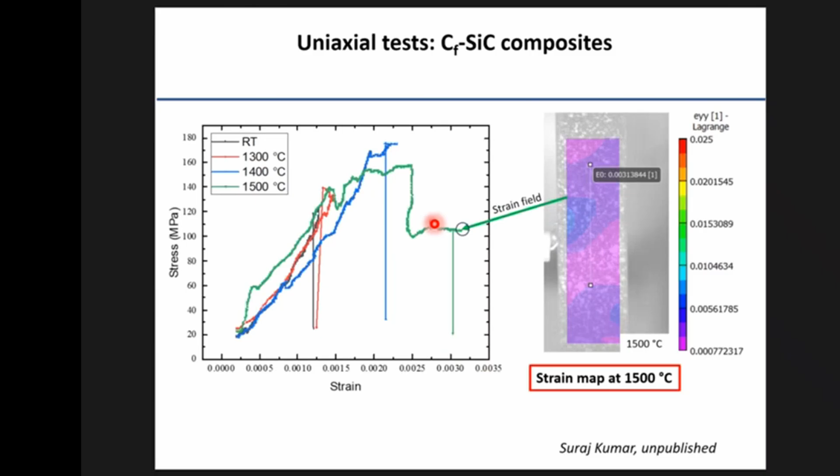So this is a fiber reinforced material, and the strains are not very large. You get up to about 0.3% or 0.2% when everything breaks.

Just continuing on this line with regard to high throughput testing. Well, high throughput is really a big basket. There's temperature, stress, and strain. So we've looked at strain and stress here so far.

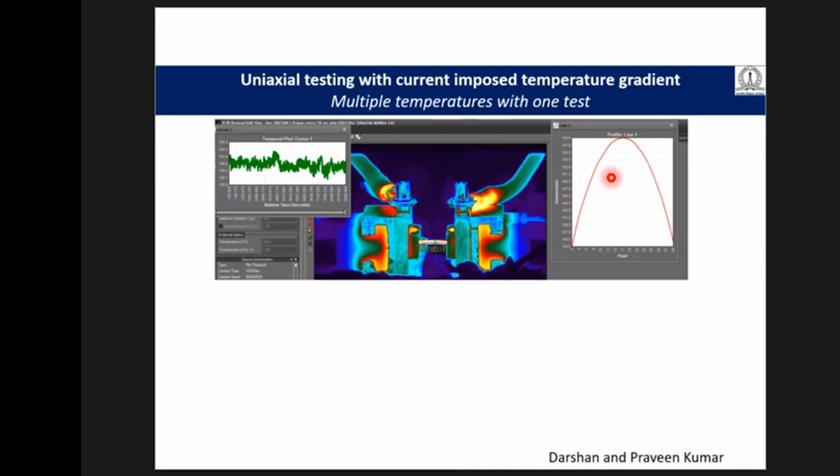So I've got it the other way around. The current is passed through the sample, and the grips are not heated, so the cooling is from the grips. The region near the grips is actually slightly colder than the region in the middle. So this is 160, and the ends are at 140. And again, it's a creep measurement.

So you can now measure creep at different temperatures, and you can plot activation energies. One of these curves is from a single experiment with multiple temperatures, and the other one is from individual tests done at half a dozen different temperatures. If one can integrate bending and temperature gradients and everything, it would be a way of extracting a large amount of data from one experiment.

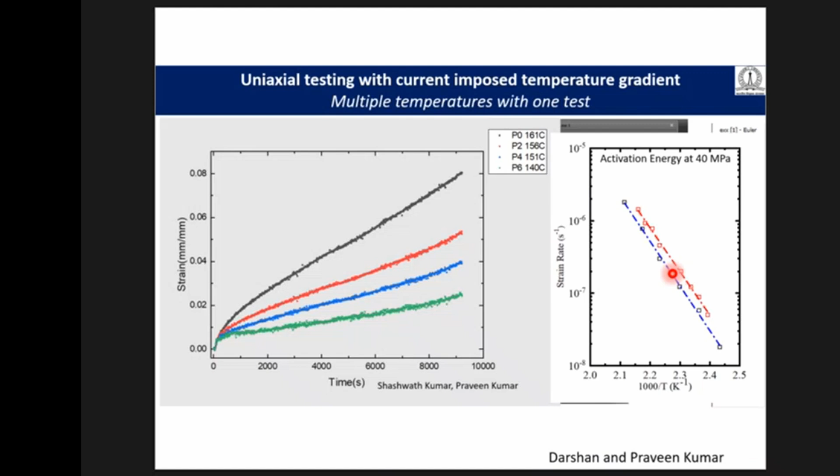So I'll just leave you with some closing thoughts. This is a very versatile technique, in a sense it's been rediscovered after about 90 years. But I think with modern imaging methods, and particularly machine learning, you have a large amount of data. The students now use all the data they get, because you're acquiring strains every few minutes or seconds.

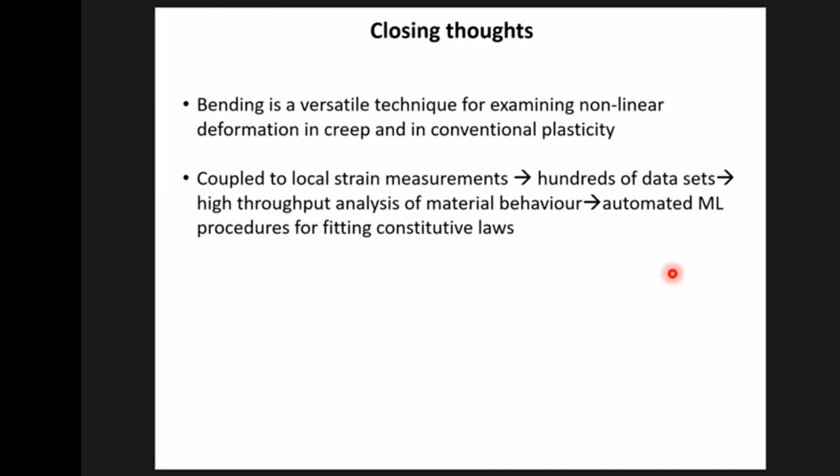And you have position-sensitive strain measurements over millimeters with about 50 micron resolution. There's an enormous potential to use machine learning methods to extract constitutive laws. Except I don't know anything about machine learning, so somebody else has to find a way of implementing this in practice.

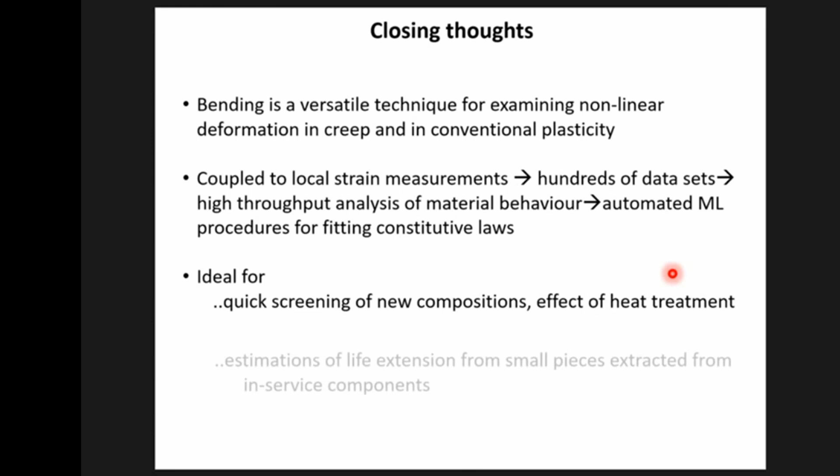It's really ideal for quickly screening new compositions, the effect of heat treatment, additive manufacturing where you can't make very large samples easily, life extension, and of course things like tension, compression asymmetry.

Actually, bending is very nice for doing compression tests. If you look at a lot of compression tests done under uniaxial conditions, the results are very unreproducible. There are all kinds of issues with friction and alignment.

This gets rid of all that, because where you're applying the load and where you're applying the deformation are two completely different places. In principle, you could do this in 3 or 4 point bending as well, except the sample volumes will be larger. In 3-point bending, you're measuring strains directly below the loading point, whereas here in a cantilever, the advantage is the loading is here and the deformation is happening there.

And very rapid analysis of graded systems like you have in welds and so forth.